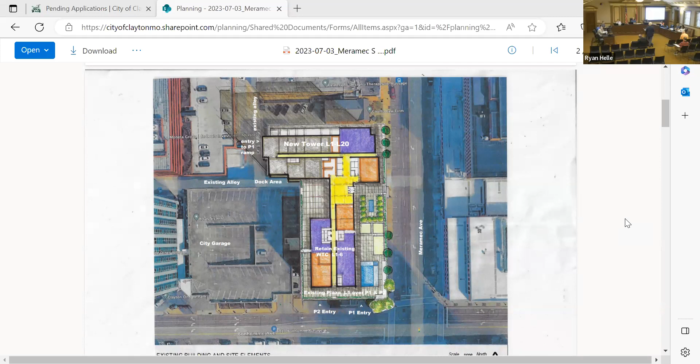We're also able to add the 21-story tower on the lot known as 121, directly north across the alley. This is an older image; we've updated these since, but you get the idea of what we're doing with the low existing building and the plaza established between the low building and Meramec Avenue at the bottom of the sheet. The entrance to the building and tower would be where the alley currently is, and on lot 121 is where the 21-story tower would be.

Do you mind going to the next image? Anybody who has questions while I'm talking, I'm happy to answer them. Let's go through the whole thing.

Okay, so here's the plaza plan as it exists. At the bottom of the sheet is Meramec Avenue, on the left is Bonhomme Avenue. The first cut off of Bonhomme is the entrance to P1, going under the plaza, and that's the only access to P1. The next cut further west goes to P2. Both have their own entrances and are not connected between P1 and P2. They come in level on both those levels.

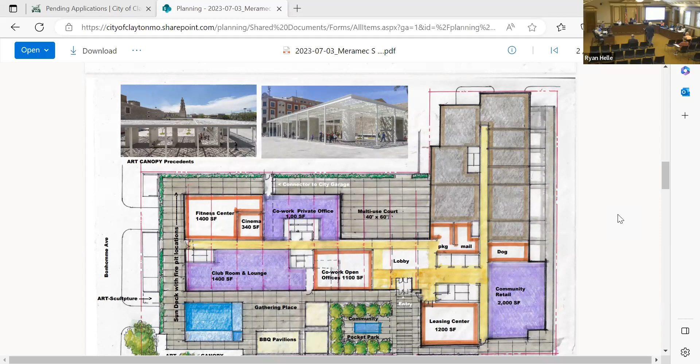If we could go to the next—you can see the greenery around the edge of the planters that would be installed, and those all become the edge around the raised plaza, the existing raised plaza area. That would all be incorporated to buffer that and make the transition from the plaza area to the edges.

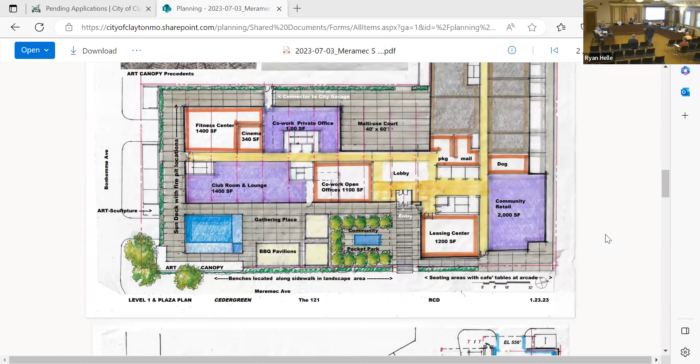Okay, next image please. So this is a combined floor of the existing tower that's been repurposed into residential on the left, and the new tower, a 21-story tower, with that form continuing up to the 21st floor, whereas the element on the left would stop at level 5, with its roof being at level 6.

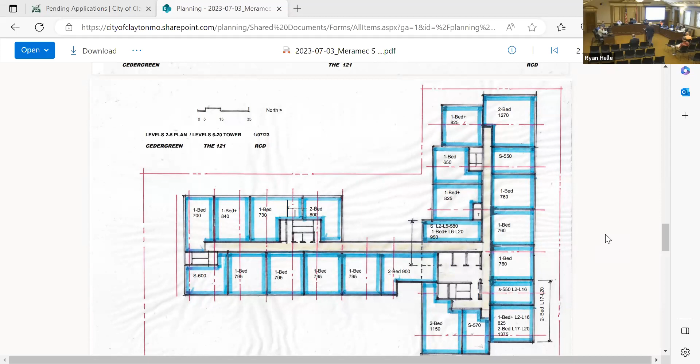I think you can go to the next shot. This is just looking at how the floors will change as we go up. We had 20 floors, went to 21, because our market study came back and said we needed some penthouse floors—larger units, better appointed than traditional, because there's high demand for those, especially in Clayton. So we added the 21st floor with outdoor patio or terrace areas and larger units.

So those would be the two plans of the upper floors of the tower.

So here on the left is a sketch, and you see at the base of the building where the parking is—the yellow is the P1 level, which goes about 4 feet above grade along Meramec, and it's 10 feet deep, a deeper floor-to-floor. The other parking levels are minimal, 8-foot floor-to-floor, so you get minimum ceiling height on P2.

Just to give you a feel for what's happening on the parking levels and the construction below grade—as you can see in the low-rise portion, we basically pulled all of the precast skin off of the building through demolition, and we're going to reskin it. In the lower right-hand corner, you start to see this very simple expression of column and beam and floor slabs with infill. That feeling is what we want to carry on the lower 5 levels.

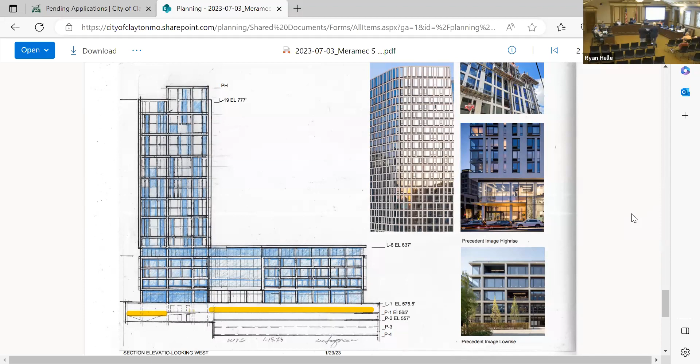Let's talk about the roof. And I don't see any indication of mechanical equipment. Will it be hidden somewhere? Well, that again, you're talking about the low roof right now. I'm talking about both. Well, the tall building is going to have a penthouse, as you see there.

And again, unfortunately, the updated drawings didn't make it to you guys. But we incorporate the mechanical on the roof of the high rise, which we're going to have the mechanical penthouse up there, which we'll have to have. And then on the low rise, we're looking at how we can minimize the amount of equipment on that roof and how we'll screen it. Not just because it's a concern to us from every other building around us, but our high rise is looking onto that roof as well.

So we really want to do something more artful on that roof, and it's just something we have to develop yet, because I think if we treat the whole roof and incorporate the mechanical into it, it can be more camouflaged, if you will, and more interesting than just sticking a screen around a bunch of split compressor units.

Could you talk into the microphone? Oh, sorry, yeah. This is the empty one, so.

So we definitely have to solve the low rise building roof. The more of the compressors that we can look at locating between our building and the parking garage is what we want to do, so we can minimize it up there. But we're gonna have some on the roof of the low rise, no doubt about it.

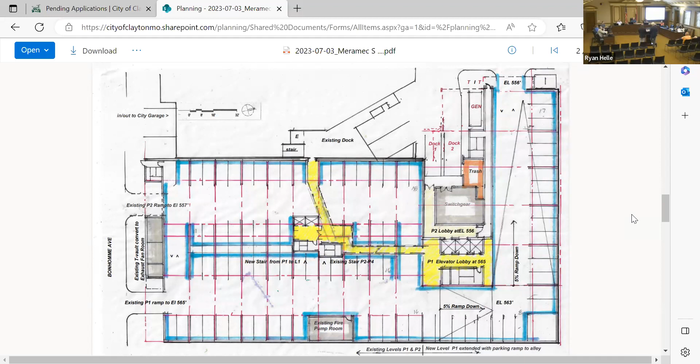Yes, because we also have parking in the city garage. That lease has been signed and entered into record.

I had one other question on my list and then we'll move on, and that was about the art canopy. Would it have any color, as we see in another building? I think it definitely could have color.

This one's in Mexico, and it's Zahner out of Kansas City that built this canopy. I think as we did evolve the brand of the building, everything happening on that plaza, how we surface the exterior wall, that plinth that we talked about, it certainly could have color. There's something pretty nice about the way white and shadows play off one another, so I thought it was a great precedent, but we haven't made a decision about that at all.

Do you have the pointer, or Ryan? I think you have the pointer, right?

I've got it. Oh, you do have it. Okay, that doesn't work... no.

That does it. Could you describe where that canopy is? See that art canopy right there? It's right along the pool, then it turns the corner and embraces the south side of the plaza. There are these existing trees that are there, really quite nice, and to be able to keep those would be terrific.

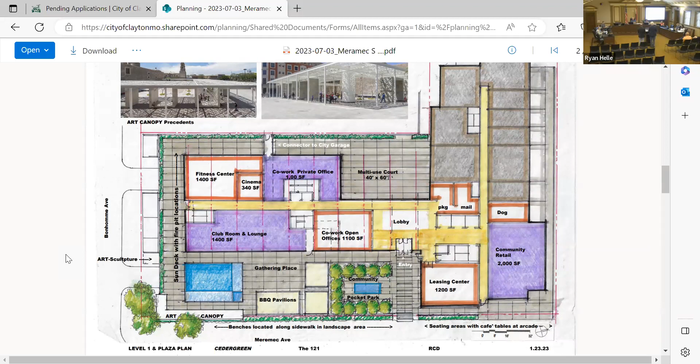If you go by there and see them, they are healthy trees, and I think they're healthy. They look healthy, I just had a 70-foot tree blow over that I thought was healthy in my yard, so we need somebody smarter than I to really say that they're healthy. Well, Carolyn will certainly take a look at that.

Okay, thank you for that art canopy, I totally missed it, I thought it was running around the building. But that will give a little more visual protection to the pool. Correct, and it'll give that comfort level from people looking down from the courts building, but also how we anchor and highlight that corner, because we have the existing plinth or parking there, so doing something more artful on that corner made a lot of sense to us. It works in a couple different capacities, how that canopy would work.

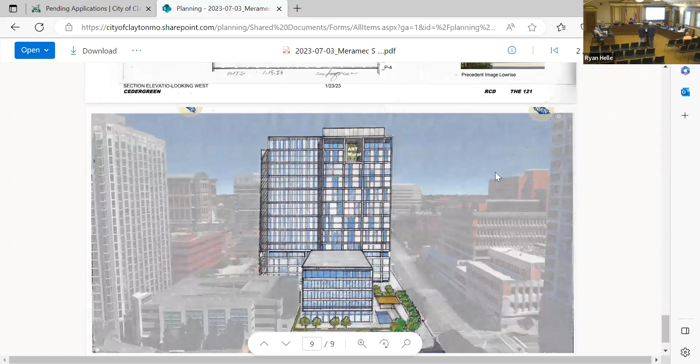Speaking of art, there's an art piece right near the top of the building. Could you elaborate a little more on that? Because we've gone through art on high-rise buildings with you before, and I'm waiting to hear your comment on this one. All right, so the updated sketch doesn't close at the top of that notch, where that green element is.

That element would project up above the roof line, so it would be complemented on either side by the tower that extends up, and then that would extend above that, and it would be lit. We haven't decided yet what that material is and what that piece is, but it's the opportunity to provide something significant there. I think that becomes sky art and not just ground art.

So if I heard you correctly, it would go above the horizontal at the roof line? Yes, so it could actually become part of the distinctive roof. Then it sort of becomes a logo or a sign of its own for the building. I think you could certainly call it that, yeah. Though I don't want it to be a logo, I think it should be more artful than a branding piece. Well, I was going to say it shouldn't be a sign.

Yeah, correct, it shouldn't be a sign. It says HOPE on it right now. I borrowed it from the Love sculpture. If you look at it really closely, it says HOPE. I can't tell that, but we'll believe it. Okay, I was thinking a disco ball myself, but we'll talk about that later.

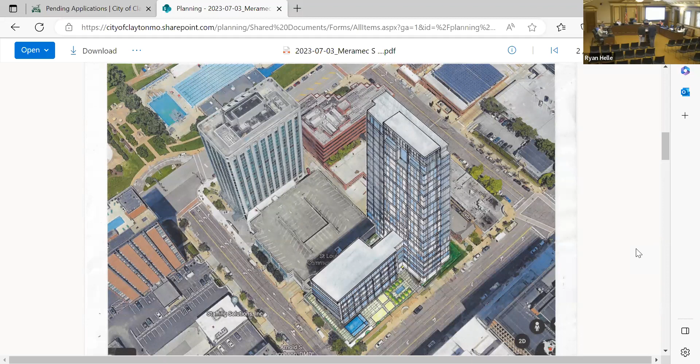I just had a couple of questions. What is the multi-use court? Is that like a basketball court, or maybe pickleball? Pickleball's all the rage now. It could be, it wants to be multi-use so it can change over time - a sport court that can have different activities on it. Is that all inside? No, that's outside. Oh, it is outside. Okay, that's all outside. Okay.

Something that often comes up, especially as you're looking at PUDs, is will there be LEED certification related to any of them? I think that's important as we look at your PUDs and the public benefits. I know sustainability is important to all of us. Carolyn asked about the green roof - whether it's a green roof, a blue roof, something to improve things, since water is a constant problem all the time, so figuring out how to take care of it in that area.

Will you provide public parking anywhere in the building? It might be something to think about for the retail establishment. It would be over in the city's garage next door. Okay, yes. So I would also make sure that as you're designing the parking garages, that there's EV charging capabilities - again, something I know the Board of Aldermen will look at if this project gets to the Board of Aldermen.

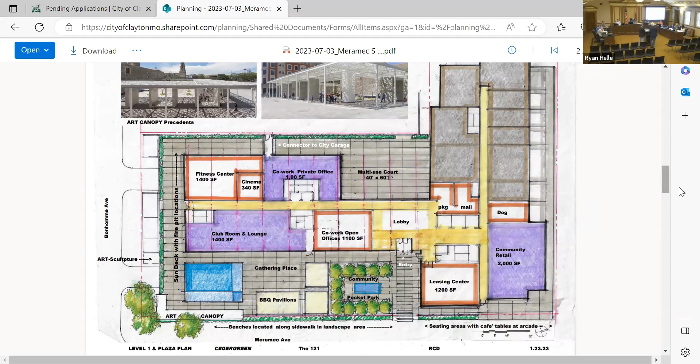The other thing that concerned me is the art that'll be 18 to 21 stories above street level. And if the building is notched back, where will I have to be in order to see it?

Well, I showed it notched back. The fact is, we have about 10 feet back right now, but that space isn't used by anybody. Depending on the materiality, it can be brought out or project up. Anybody going north on Meramec is going to see that element. We can actually put it in the computer and show you some sight lines so you have a better idea of where you'll see it and where you won't.

My other concern would be that the cost of that could be value engineered out, which happens. So I'm open at this point. The ball's in your court. Okay, thank you.

Amy: So I'm in agreement with what a lot of people have said. It's funny, I had a big start about pedestrian experience and then you took that one. But I do think it would be important, when you come back, to get that Meramec elevation and the south elevation to really understand what that pedestrian experience is, because it's a giant wall, and even at 5 foot, that's pretty much eye level for most people. So I think that's a tricky thing to figure out.

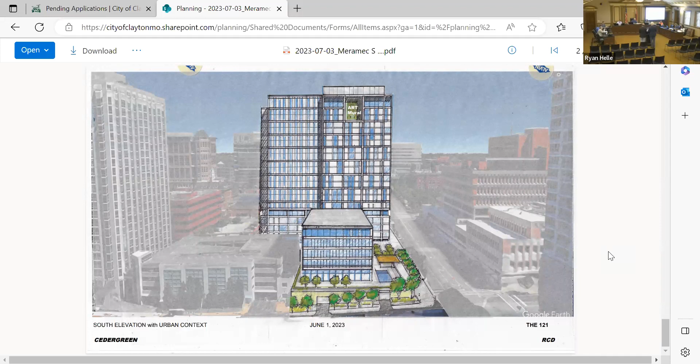Chris: I had only one other thing on the sheet that looks more like a sketch, I guess it's levels 6 through 20. Is the building actually going to be angled on the west end? I had stair stepped it, and then as I started developing the elevations and looking at it, I thought it could be a little stronger to have it as a bevel versus a stair step. So I'm in the process of determining that for sure. The initial reaction from other folks is they like the bend in the building versus the stair step.

I like the bevel, and I like that there's a little notch that strengthens and sets that piece apart as a smooth transition. Agreed. If you notice, I even moved it a little bit further just to get the structural lines, and the structure is going to evolve too.

Well, anyone else on the plan commission have any other comments or questions?

Do you have anything for us? Yep, we look forward to coming back and showing you what we've got. I just wanted to say that, take...

Michael Knight from Revive Capital couldn't make it here because he's finalizing some documents, but he's very committed to LEED the Commerce Tower in Kansas City, which he redeveloped, 39 stories. It was LEED gold, if not platinum. I know it was gold for sure, it could have been platinum. So to your point and the LEED question, there is that commitment there, and he's dying to get moving on this.

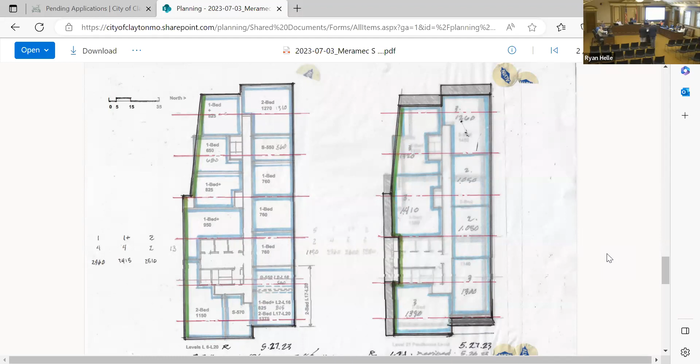Well, it's been a dead corner for a couple decades, it seems, and we're ready to see it move forward. So we applaud you for taking the challenge, and we look forward to you returning again. Thanks very much, I appreciate it. Thanks very much, all right, thanks.